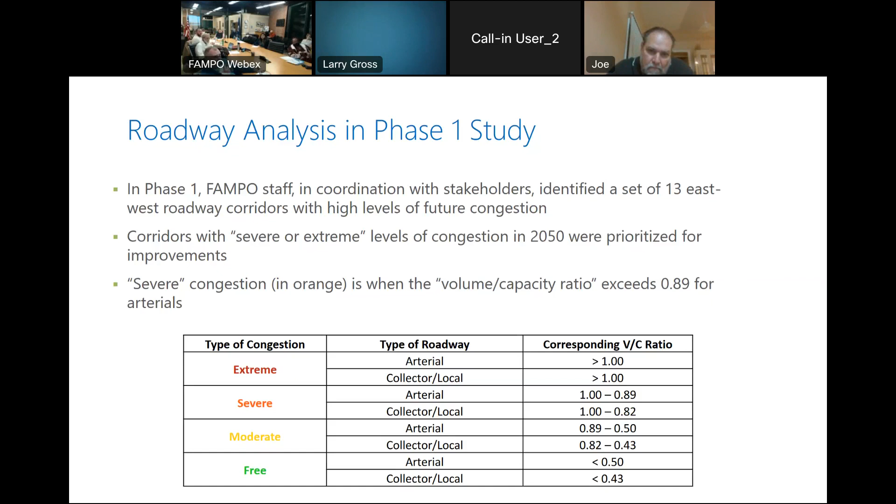And they picked these 13 corridors. Now, as they were going on for a future analysis, they were also talking with the citizens groups, policy committees, and about a few of these other roads. And I believe that initially Enon Road wasn't on this 13, and Stafford County staff swapped it back on. We'll get back to Butler Road, which you'll see eventually disappear from the analysis, because although it's identified as having potential congestion, within our current plans is an expectation that it will be widened to a 4-lane facility instead of a 2-lane facility. So in the future it would no longer be a congested, restricted network. So you'll see some of the movements happening.

Yeah, I remember that was one of the issues that came up during policy committee, where it showed Butler as not a big problem, and everyone put a red flag on that. But the model assumes that what is currently on our long range plan and is scheduled to be built or improved will happen. If we do everything we say we need to do, okay, what are going to be the next items that we need to address? So next slide.

So here are the corridors mapped out. As you can see, we are predominantly looking at east-west connections, and there's a general trend that they span 95. Those were the routes generally being picked up, because the consultants said that as our roads were along the I-95 corridor in areas that generated traffic, such as commercial real estate areas that were particularly automobile dependent, those areas are going to see more and more congestion develop into the future, even if we build out all of our current transportation projects.

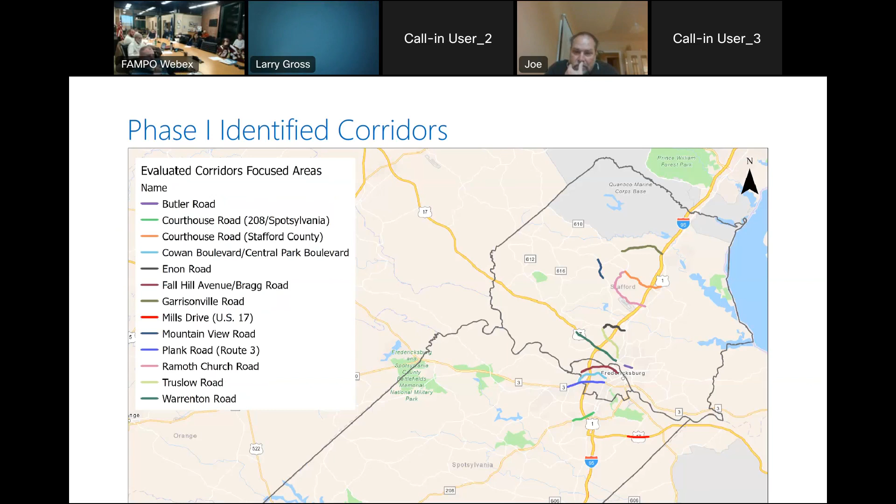Next slide, please. So jumping ahead, they actually took the peak PM volume to capacity ratio. So this would be peak evening rush hour.

So there were some questions and concerns. Why didn't we use AM, whatnot?

I can't speak for the consultant specifically, but my guess is that traditionally as traffic builds through the day, you have that PM peak and it's a little bit harder to work its way through, versus AM where you kind of start from a very low demand and it spikes rapidly. So that's my guess, traditionally PM peaks tend to be worse than the AM. Not always. I think Garrisonville Road kind of noted that the AM is probably a little bit worse.

So there are examples, but system-wide, generally, we kind of look at the PM peaks. And if you look at it, some of these are unequal. So just because one roadway - what was the best example? Garrisonville Road kind of shows that one direction tends to be a little bit worse than the other. There's a few examples where the eastbound, or depending on which way the traffic is flowing, is going to be worse than the other. That's traditional, what you'd expect from different traffic volumes in different directions at different points in time.

So really, about 0.65 you start noticing a little bit more traffic, just how it feels. You say, okay, there's a little traffic kind of picking up. As you approach 0.8, you're like, okay, this is getting congested. By 0.9, you're like, okay, this is heavy traffic, and then your blood pressure raises if it goes much more above that. So just to give you a feel for that.

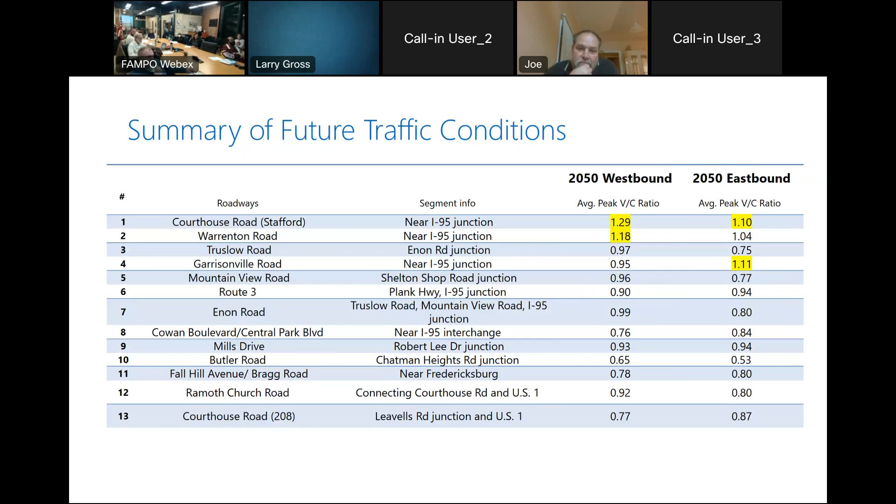So we're seeing significant congestion along our east-west corridors. Next slide, please. So again, I kind of jumped ahead - they said that there's a large amount of congestion in auto-oriented commercial activity. We still see severe congestion even after we implement a lot of our projects.

Some of the items they're going to get into later on is that we can do some specific spot treatments to very specific corridors, but we still see a regional congestion problem. So we're kind of doing small spot fixes, but we're really having a bigger picture item that we're struggling to contain. Next slide, please.

So the recommended corridors and approach - these consultants are taking a very high level look. They're not quite getting down into the weeds over the true engineering. That's a later phase, where they'll come back and say we get to pick our greatest hits and which ones they'd like us to explore from more of an engineering level. So this remains kind of high level. They're not really going in depth into design, not really looking at parcels or properties or the environmental costs.

It's still kind of somewhat remote. They can give very broad stroke cost estimates of what they think, but those can change as you dig down. So as they refine the various stages, they can provide a few more details there.

Route 3 continues to be kind of more of a bigger puzzle to solve, and some of the challenges it faces. I don't think they had really a whole lot specific that they want to address. It's just kind of news that that one's going to be a bigger challenge and probably needs more of a focus at a later point in time.

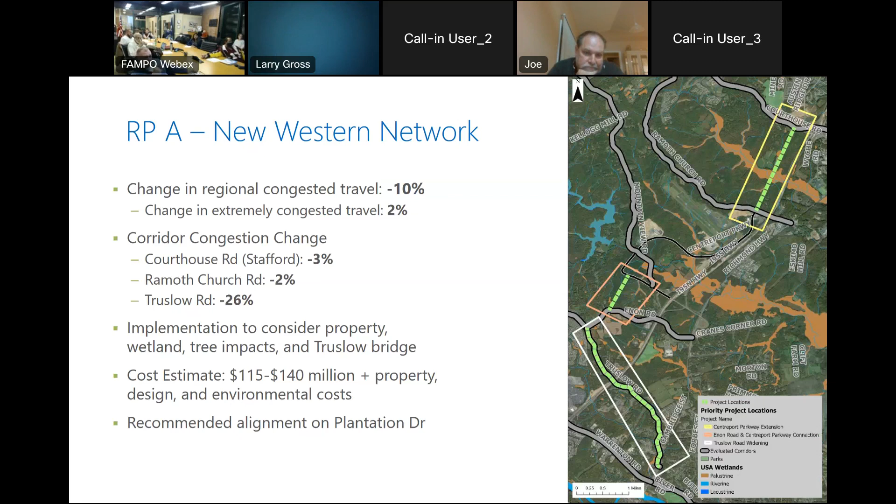Oh, and they're recommending aligning with Plantation Drive in the southern part. So that is the Western network they're proposing, to try to eliminate some of the congestion on east-west by making a north-south road. Next slide.

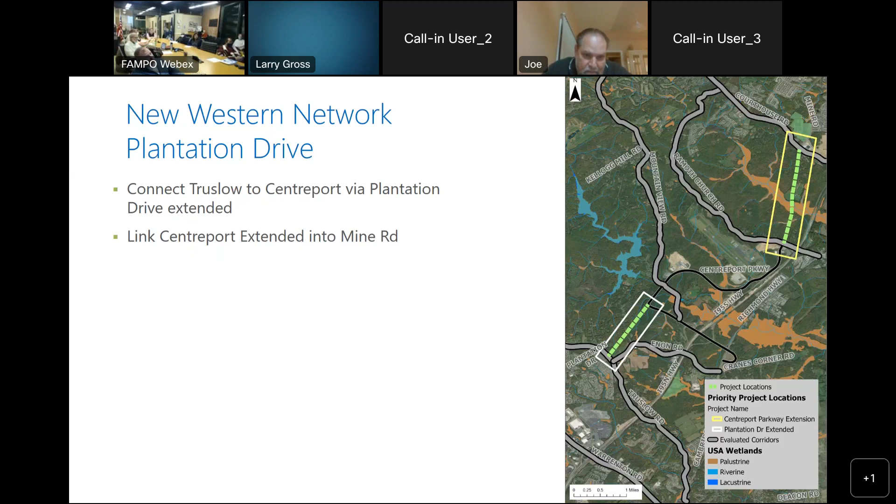So the new river crossing. This was another item that came out from the consultants. I'd like to note that there are two different things going on with the river crossing at this moment. Just before the consultants came to staff with this concept, Stafford County and the City of Fredericksburg requested FAMPO to do a river crossing study, or an early scouting project. So this is actually quasi-independent, or developed independently of those two items. Staff at FAMPO is further exploring this, but this is what the consultants VHB identified.

What they noticed is that there's a high amount of volume from Route 17 that is either taking US Route 1 or I-95 to access the Route 3 corridor. There's a suggestion of what they call a reverse C movement—coming down 17, going north-south on Route 1, and then back out to Route 3. They said that was a significant bottleneck, particularly putting additional pressure on the road network in and around the 95 and Route 1 connections. Those going beyond that area were dealing with a lot of local traffic.

In their analysis with the FAMPO travel demand model, they saw adding a river crossing reduce congestion within the region by about 10%. It actually has a very large reduction in extreme congestion. The roads that see the highest impact are Warrenton Road and Fall Hill. Route 3 does see a 1% increase in congestion, but that's very dependent on what section of Route 3 you're on—parts close to the interstate see a reduction, parts closer to Gordon Road see an increase. So not all roads experience the same amount at the same place. Cowan Boulevard also shows a small increase.

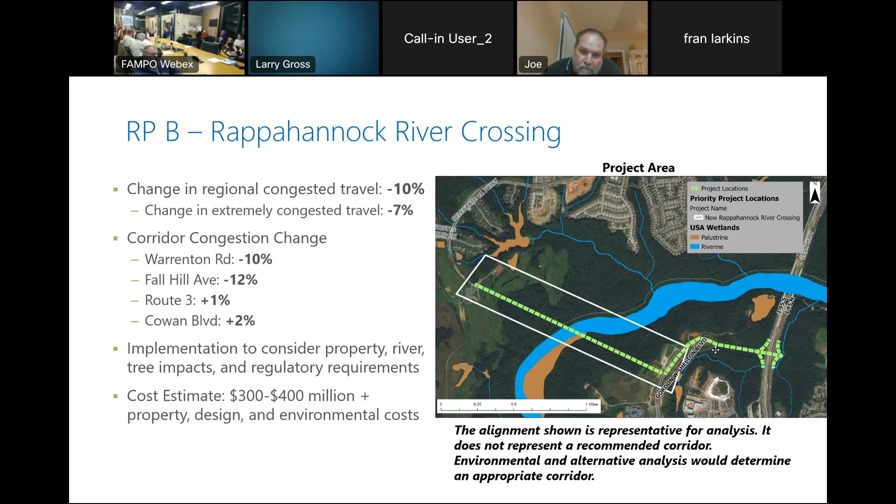Yeah, I think it's been talked about over numerous years. Decades, actually. At one time it was a gondola connecting from Celebrate, where the shops are right now, across the river to where Wegmans is going into Carter.

But I thought the north and southbound river crossing projects were supposed to mitigate the congestion on 17, improving the interchange there. Each of those projects cost around $400 million, but that didn't mitigate it. The southbound has been open now for a year, right? It's going to mitigate current levels, but not long term. What we're seeing is that we are going to build right back to capacity in short order. And the other item is, while it does make improvements, it's still funneling a lot of local traffic to basically the 95 corridor to make local trips across the river.

So was there a city council resolution? There's a letter and statement from the city, yes. No, it was a formal statement by the city to the FAMPO administrator.

This is kind of surprising to me because I was around when they first proposed beltways around the city, they called them the Northwest Corridors. And one of the biggest objections coming from mainly city residents and city officials was that the Rappahannock River is like the last, or next to last, river on the East Coast that still looks like it did before European settlers found the continent. It's an irreplaceable treasure, not to be screwed up with a bunch of bridges.

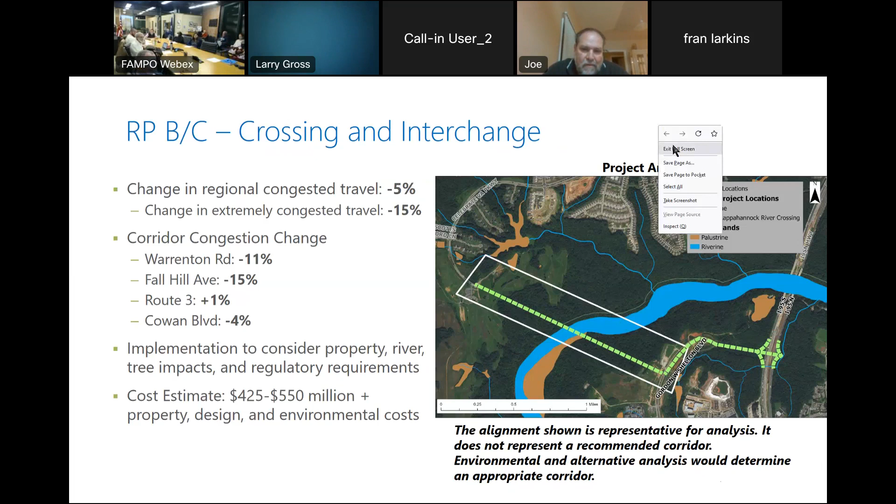I was noticing, on page 12, they make a reference to other strategies. I haven't seen anything mentioned on here about the other strategies besides building these roads. You know, on page 13, we talk about a few petitions, but we also had the transit report that was just adopted in the previous round as formal items. You're saying something was adopted; you were saying something was considered and rejected. No, so this is the roadway study. Phase 2 is broken up into two different areas so that the consultants could do it piecemeal, resize it for their scope. But there was already a transit report that was presented and adopted by the policy committee at their last meeting.

I'm talking about the introductory remarks in this report. You're saying things like consider reducing the volume to capacity ratio. Not accommodating it, but reducing it, which is what I've been talking about here for years, addressing the demand problem instead of trying to supply all the asphalt that everybody wants. So I think it's great that they're talking about reducing the peak velocity and the other strategies. But that's just an introduction. When it came down to the nuts and bolts of what they studied, they blew it off. Well, I wasn't at the meeting. Maybe it was considered, but if it was, I don't see any evidence of it in writing. So it appears to me the idea of reducing the demand for this asphalt is just being blown off, even though they say they're going to do it at the beginning of the study.

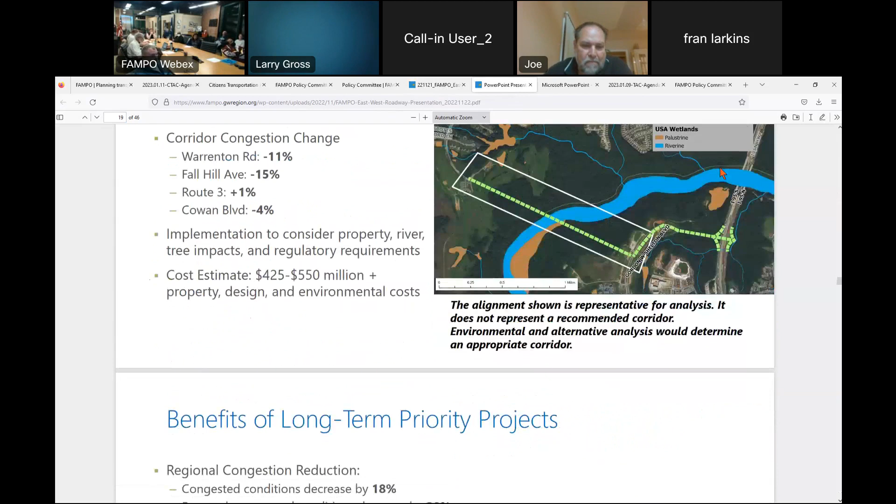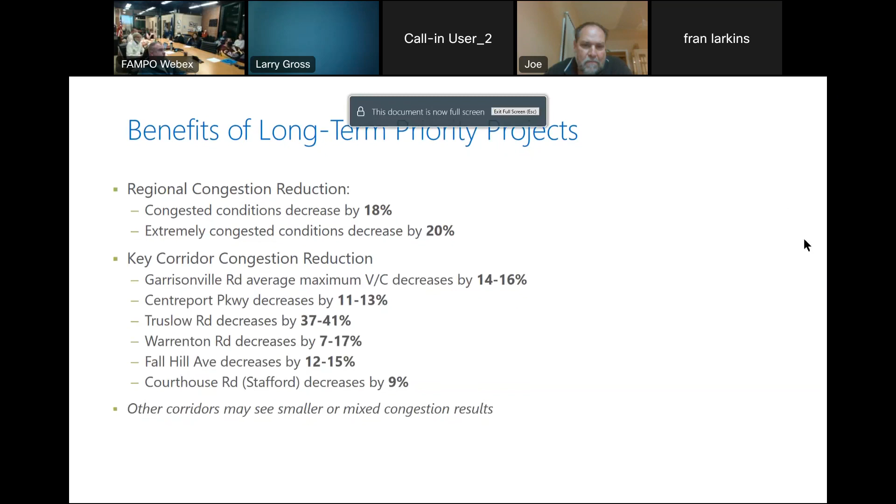Anything else before we move on? Okay. All right, let's jump to the next slide. Let's see what is next. If you'd like to look at a specific treatment, you can reference the full report so you can see how they got to their reductions. But the combination of, I think, the Western corridor along with the bridge created a pretty significant decrease in traffic and congestion.

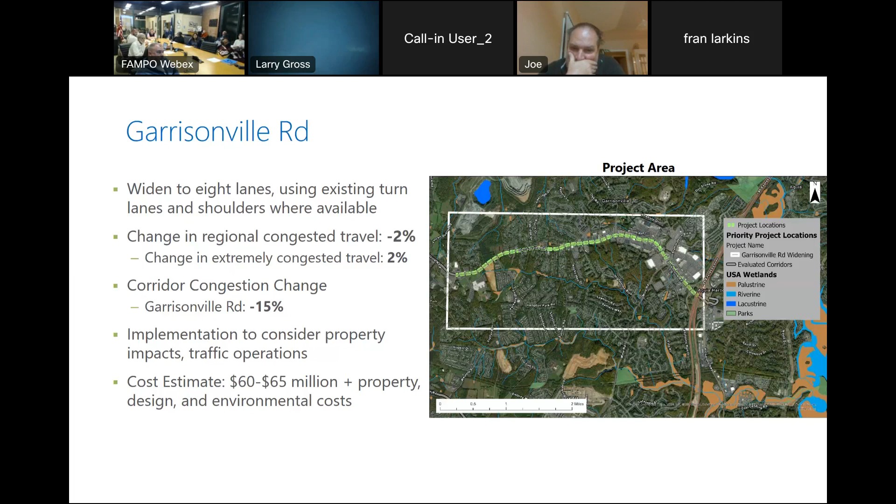Next slide. So, because I know that this is going to go over well, in addition to their Western network, they looked at spot treatments that were going to widen east-west corridors. For example, to accommodate the future growth and vehicle usage along those corridors, they were suggesting that Garrisonville Road would need to be widened to about 8 lanes. They are looking at using existing turn lanes and shoulders to make that possible. In general, for the region, this really doesn't do a whole lot to move the needle for reducing congestion. It just does a lot of congestion reduction on Garrisonville Road because there are more travel lanes. Cost is a little bit less than some of the previous projects, $60 to $65 million. That's actually a moderate amount for road expansion. I do believe that VDOT owns a significant amount of the right of way, so that was one thing that they noted.

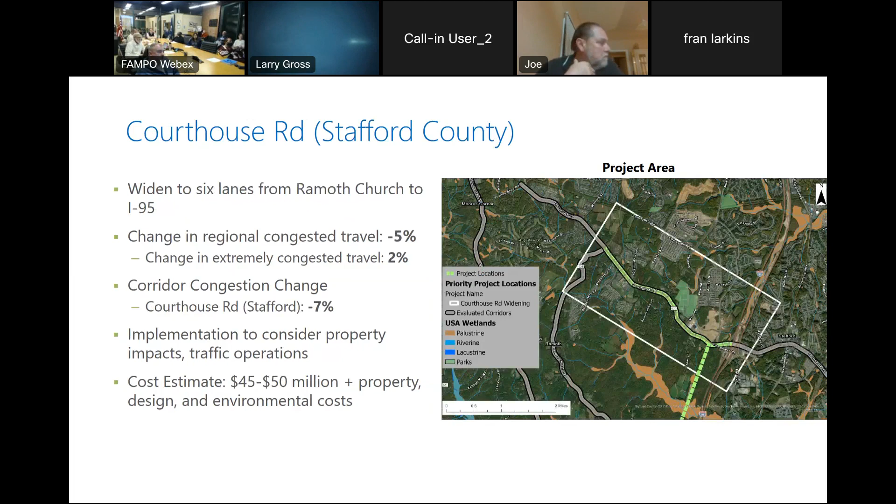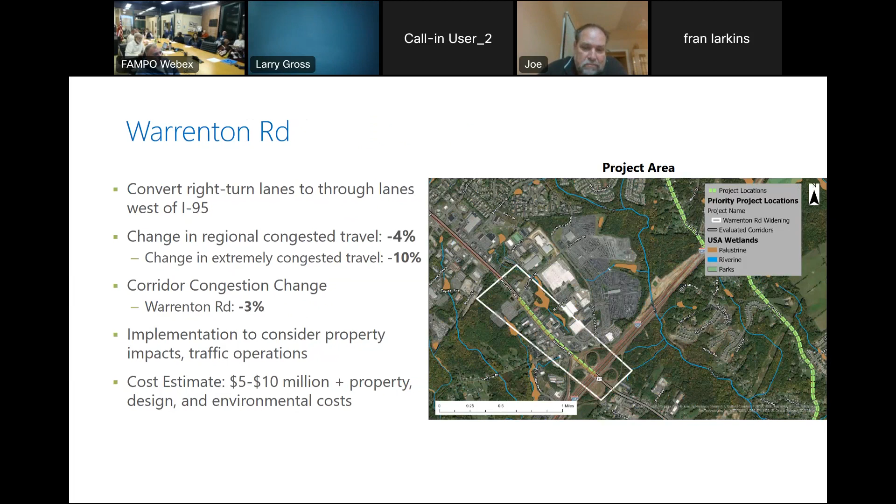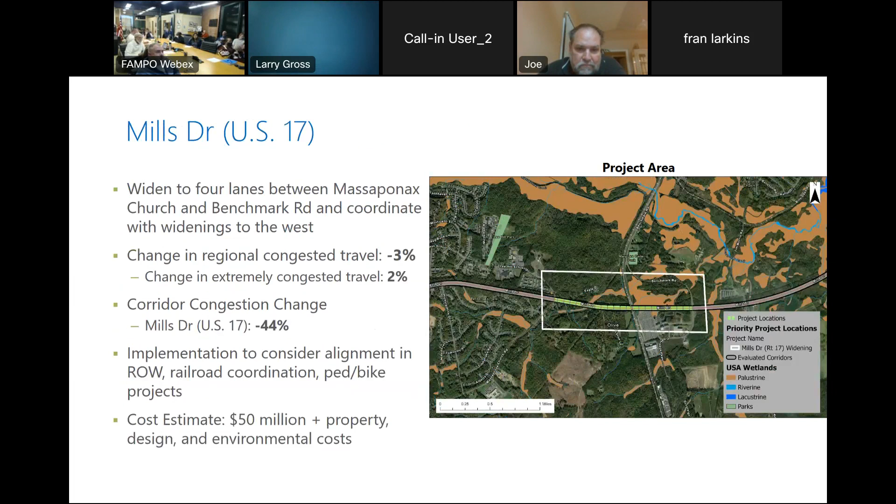Next slide. Courthouse Road, again, widened to 6 lanes. It creates a congestion reduction because there's additional capacity. Cost is kind of in the middle range there. Next slide. Warrenton Road, convert right turn lanes to through lanes, and we'll see a moderate amount of congestion reduction with that recommendation. Next slide. Mills Drive, again, a common thing to accommodate the future congestion, widen the lanes, so this will go from 2 lanes to 4 lanes. It has a congestion reduction, but again, it doesn't do a lot for the region. Next slide. So, are there any questions about those? I went through them fairly quickly. Okay. Next slide.

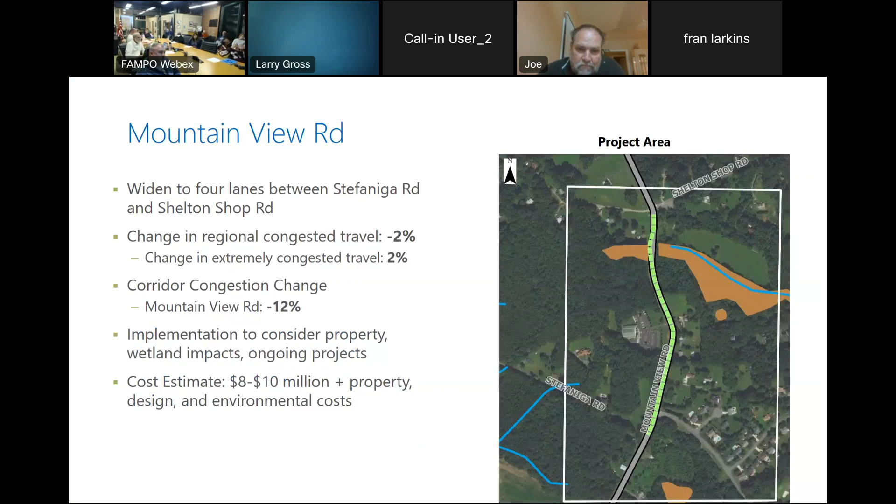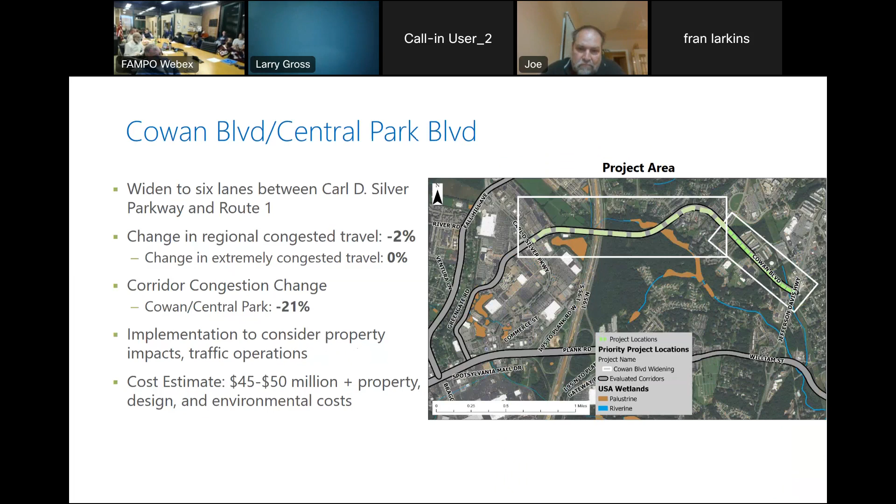Again, we have additional road expansions, 4 lanes with Stefaniga to Shelton Shop Road. This is a smaller project, but it would reduce congestion on that roadway, but not for the region. Next slide. Cowan Boulevard, they highlighted as a potential option to expand to 6 lanes. It would be a reduction for that corridor, but not necessarily for the region. That one probably has higher property costs, but to accommodate the traffic, we would be looking at that. Next slide. They also identified the Harrison Road interchange as a potential project. This would be a large one, and there are some other considerations to account for, but adding Harrison Road there, as well as the county's other projects leading up to it, would be a targeted project for some individuals.

And this one's kind of bounced around in the models a few times as they've refined and addressed some things. You've seen the benefits kind of fluctuate, but I think that's just an item as the model was getting refined, that the congestion reduction looked great in previous rounds, and then the reduction decreased. Is that correct? The point of the Harrison Road interchange, it has to come part and parcel with the 4-lane widening of. Oh, that's correct. Yes. From Salem Church on, but also this is the project that provides the most congestion relief to Route 3.

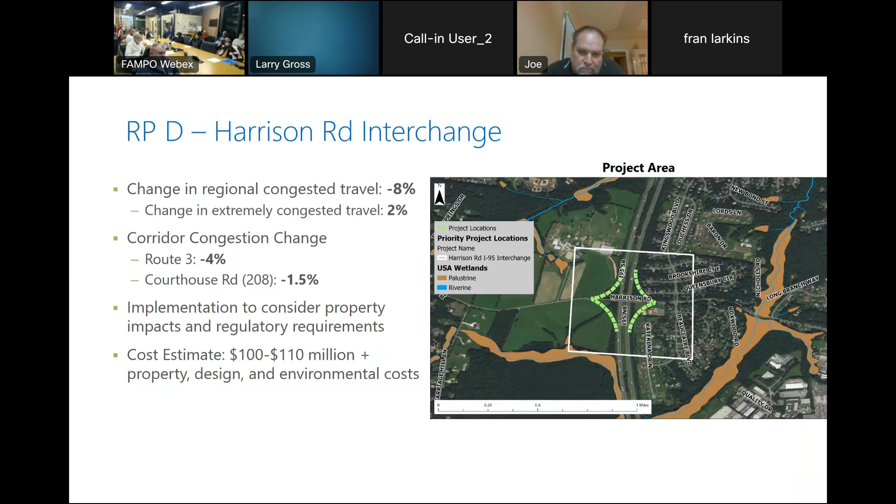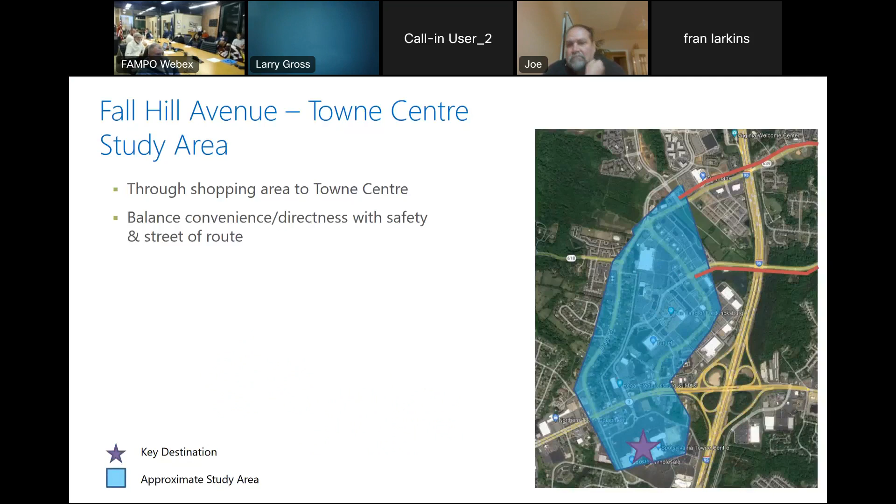Okay, next slide, please. So also in this roadway report were pedestrian and bicycle projects identified. Next slide. So they looked at connecting Fall Hill Avenue and the Spotsylvania Towne Centre. They drew a wide swath to identify potential alternative plans. Next slide. And the primary route that they identified would basically follow Carl D. Silver Parkway, along that central commercial center, and cross Route 3. So it was a way to expand and connect pedestrian activity, and that would probably facilitate other uses also happening in the Central Park area as well.

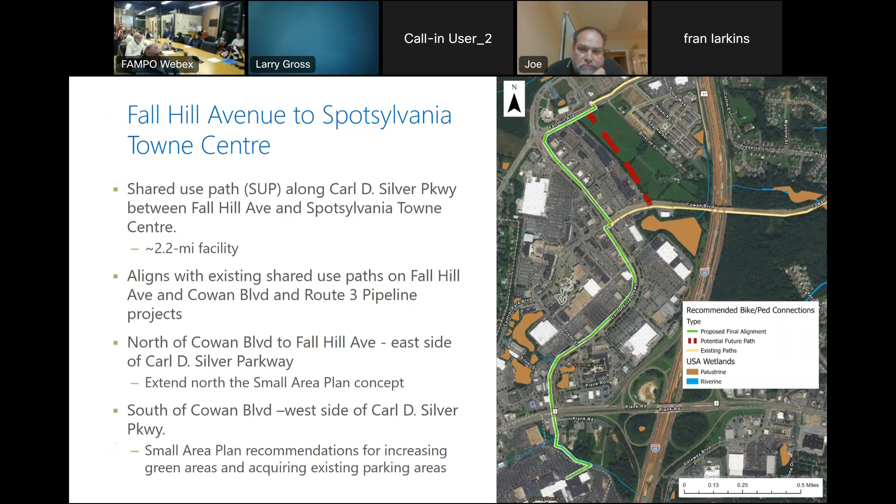It does have to zigzag a little bit across Fall Hill and then at Cowan as well, to keep the alignment, but that was one of the projects they identified as a needed bike ped shared use path along that corridor. Next slide. It does need land from parking, so there's probably some land cost that would have to be addressed with this project. Next slide.

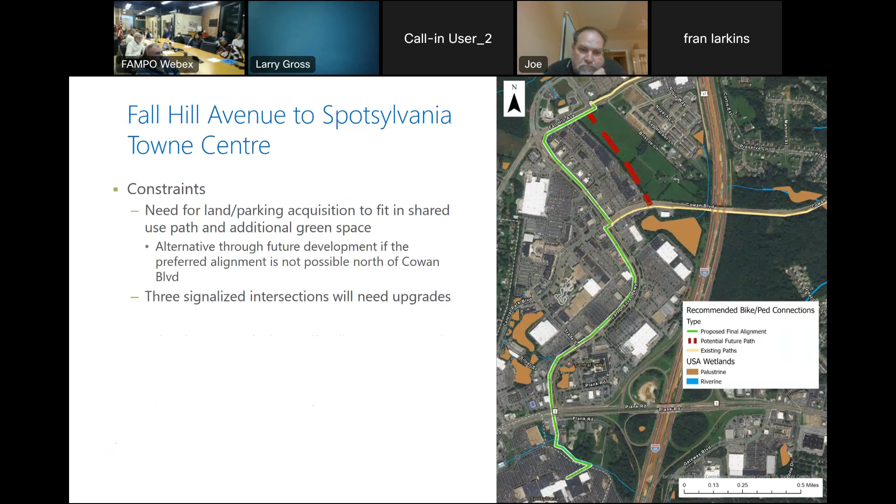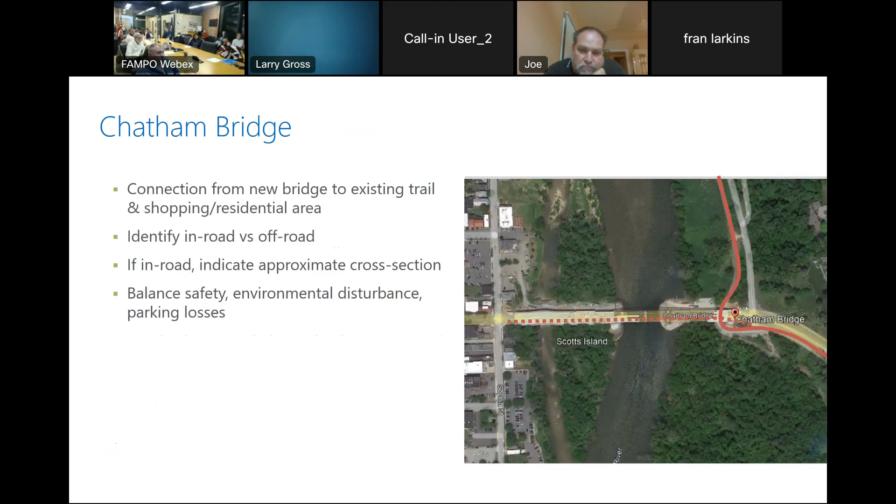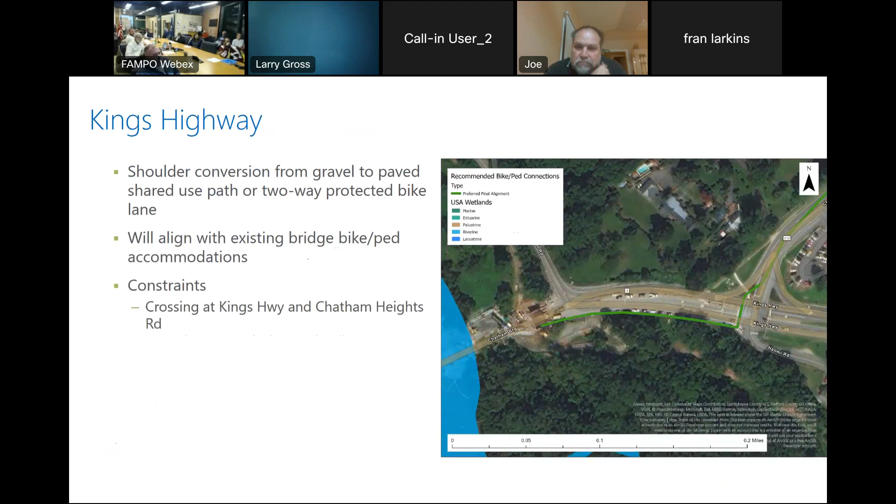So with the new connection from the Chatham Bridge, there's a future concept to extend the bike and pedestrian networks that are coming across it. So you can go to the next slide, and it's going to be particularly connecting with Chatham Heights there, to extend the bike ped facility across Route 3 and then up Chatham Heights Road. Next slide. And with this treatment, there's also going to be a recommendation of doing some road reconfiguration. Right now it's a 4-lane, for the most part undivided, highway. Occasionally you have extra lanes here and there for turn lanes, and a lot of spots you do not. The traffic volumes are relatively low, particularly for a 4-lane facility. They were not seeing as much vehicular pressure to need that.

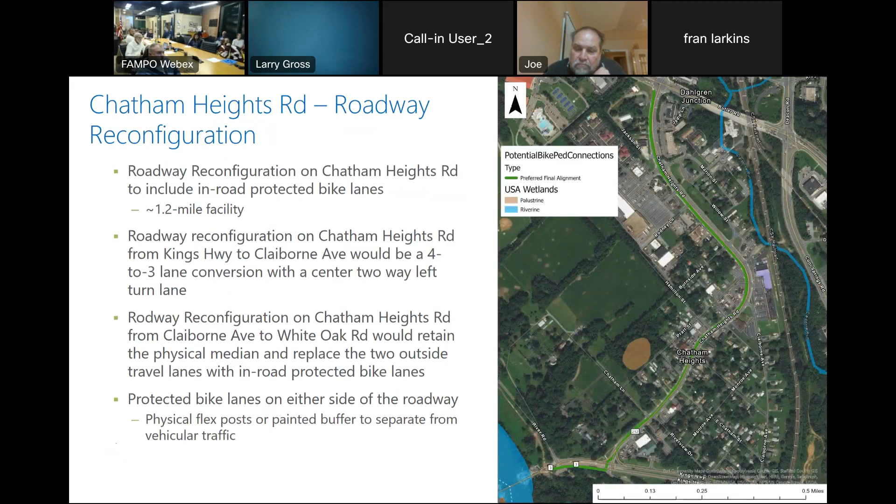And so if you go to the next slide, they're suggesting to reduce it to a 3-lane facility. It'll be one lane for each direction with a center turn lane in the middle. In some other places, they would call this a road diet. I don't know if that's a dirty term here, but that's the more common national term. As it stands, Chatham Heights Road right now is almost functioning in that capacity, that if you have to make a left turn, you have to do it from the left travel lane. So in a quasi default way, it's already functioning that way. And so to make the bike and pedestrian facility work, they would use the existing DOT right-of-way and then shift the lanes to provide the space while still mostly keeping the same amount of roadway functionality through that area.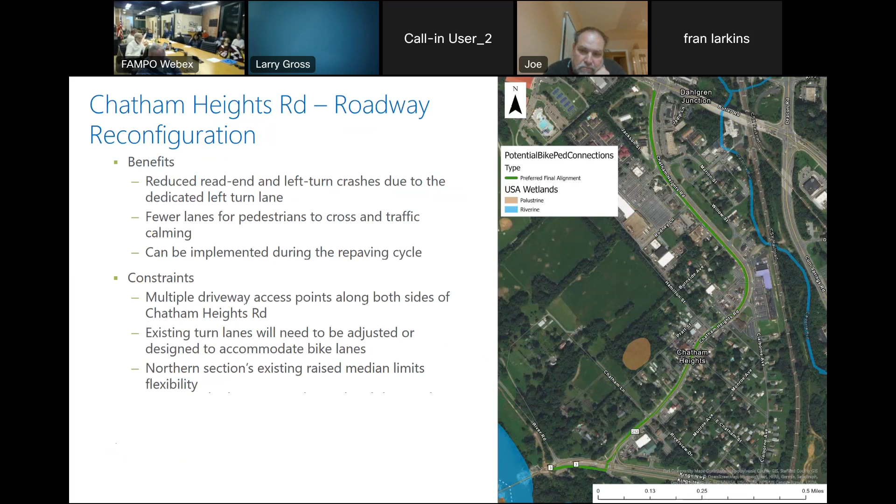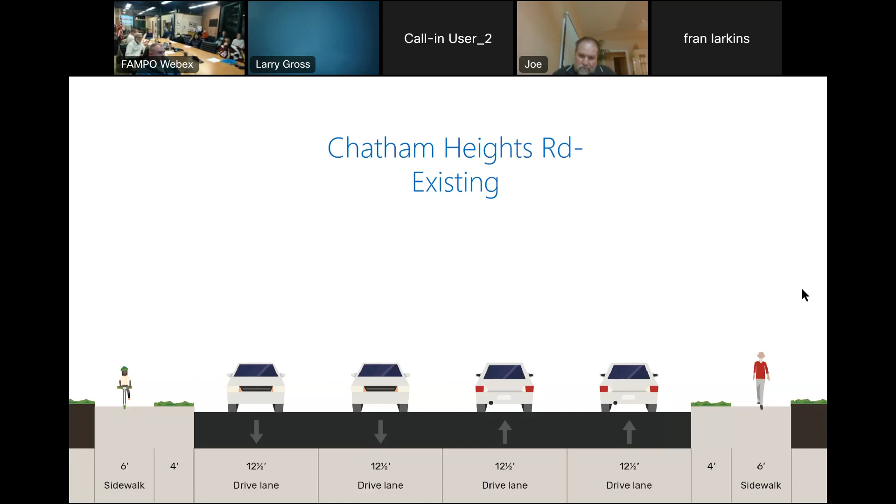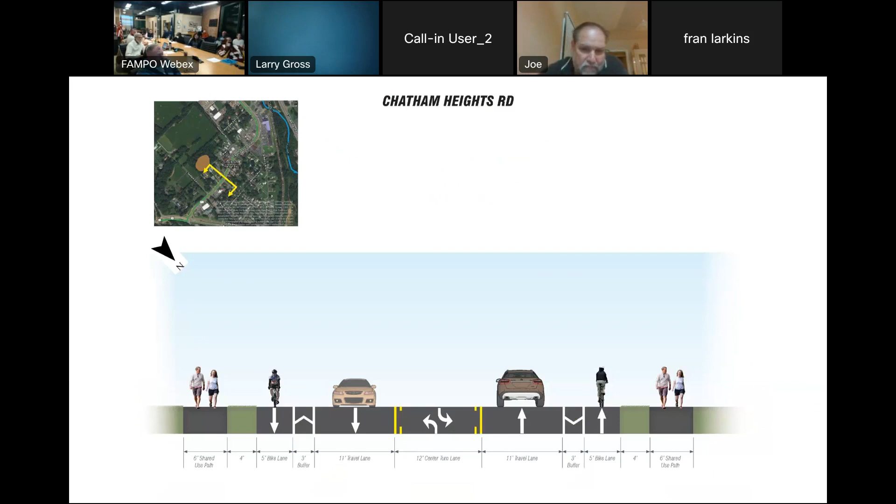Next slide. So this is the current cross section. As you can see, it's just a 4-lane with paint in the middle. It does have some sidewalk facilities around it. And if we go to the next slide, this is the recommendation. Typically any roadway that's under about 20,000 vehicles a day in average daily traffic, it works pretty well. Starting over 20 it doesn't work as well. 25 makes it not so much, but I think Chatham is around 14,000 vehicles a day, if I remember correctly. So this puts it in the perfect zone for this type of treatment. So that was their recommendation for Chatham Heights.

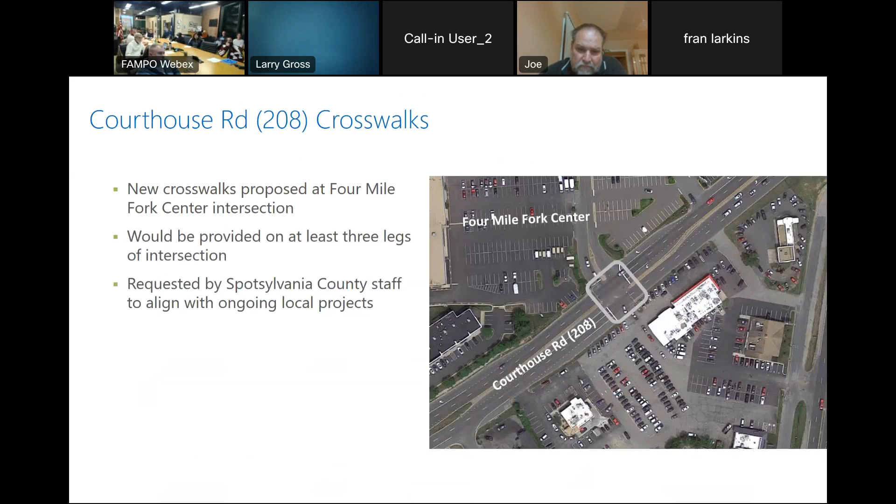Next slide. And then they also identified specific crosswalk improvements on Courthouse Road. This was something that was requested specifically by Spotsylvania County staff to align with other projects. Next slide. And for the next steps. So they identified, I should say, start with public. No, you're good. I'm jumping ahead.

That's my problem. So right now we're in the middle of our public outreach periods. So please, if you have comments on this document, please let us know. Based on the policy committee and public feedback, a final roadway report would be developed. So at this point in time, it's a draft. So if you want to come out and say, what are the other treatments? This is a good time to do it.

And they're going to also take a select number of projects that they've identified here and say, okay, they're going to take it one more step further and start to do some kind of early engineering design work for this type of project, so that it'll start creating a process that would lead to hopefully being a project competitive for a future round for funding approval. So it's kind of starting that process to say, okay, we've done a little bit of study work. Let's do a little bit more homework and start developing this into something that can compete for funding from the Smart Scale process. So next slide.

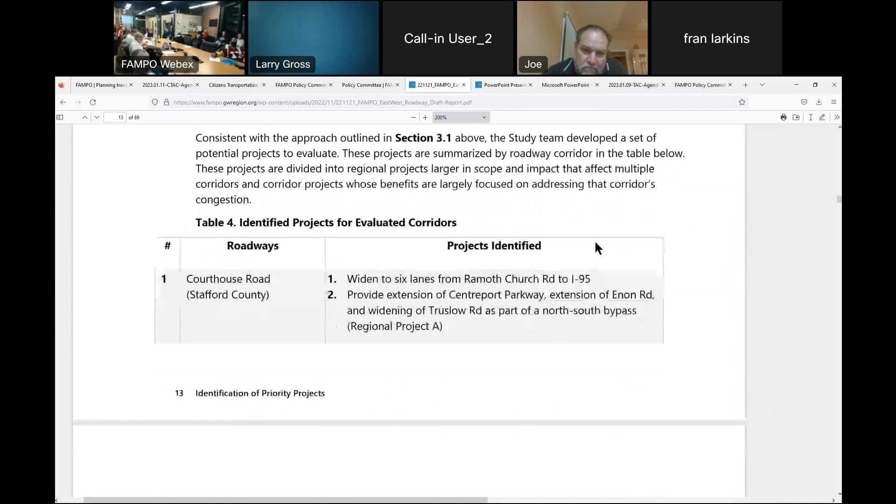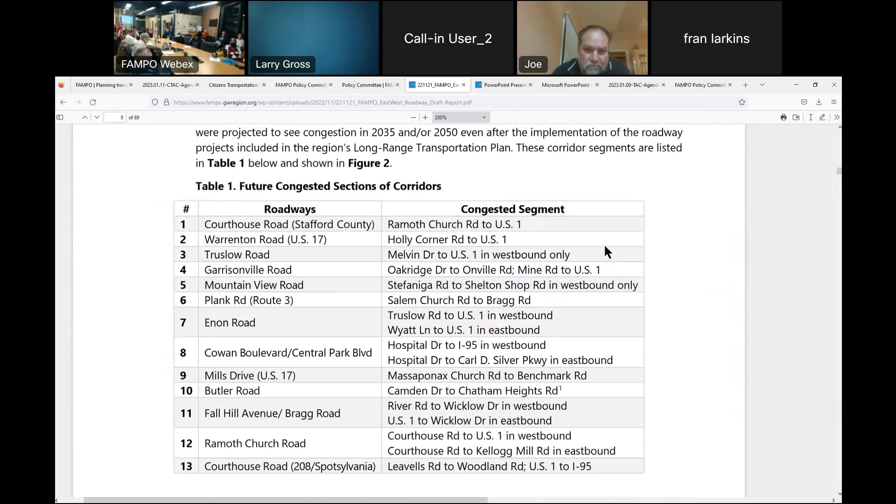Yes. Rupert. You skipped the mall flyover. The mall flyover. In the packet that we had to review for this meeting, one of the projects was a flyover at the mall. Anybody else read the material? I don't remember it immediately. Are we online to get this information? Yeah. It's online. It's the same document. Yeah, if you click the link in the agenda in the email. It was under the bicycle and ped section, which is why I was going to ask why a flyover is in the bicycle and ped section.

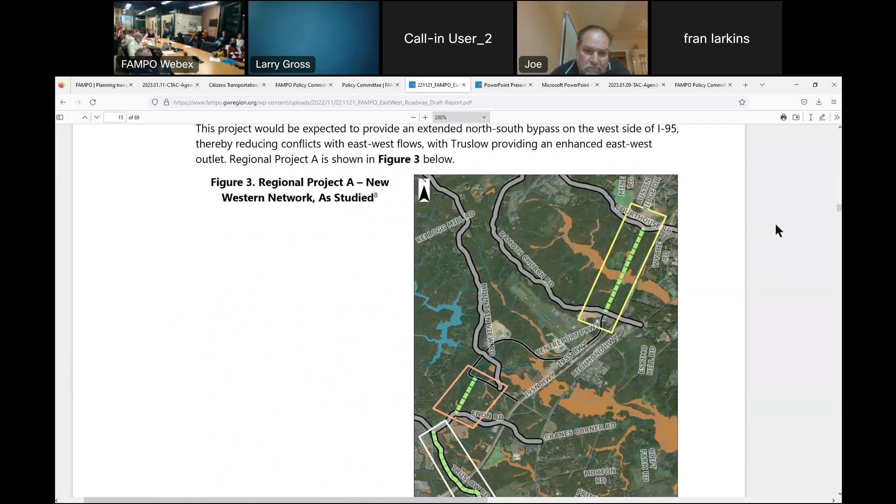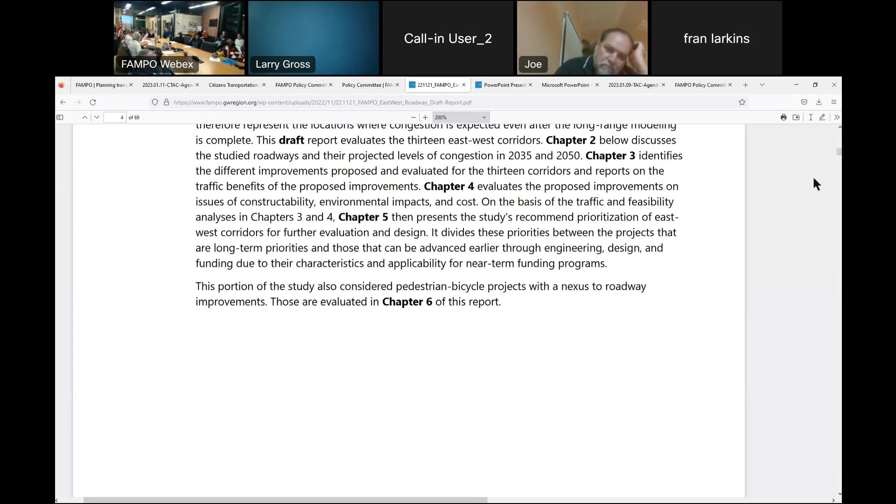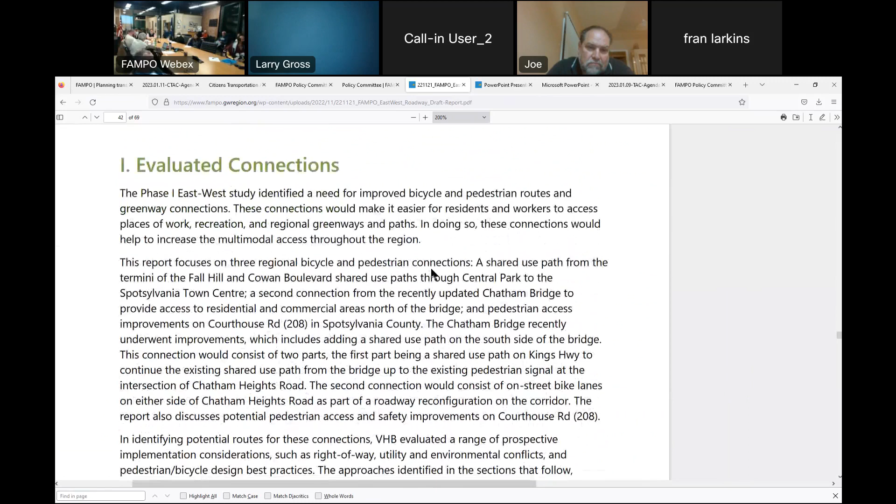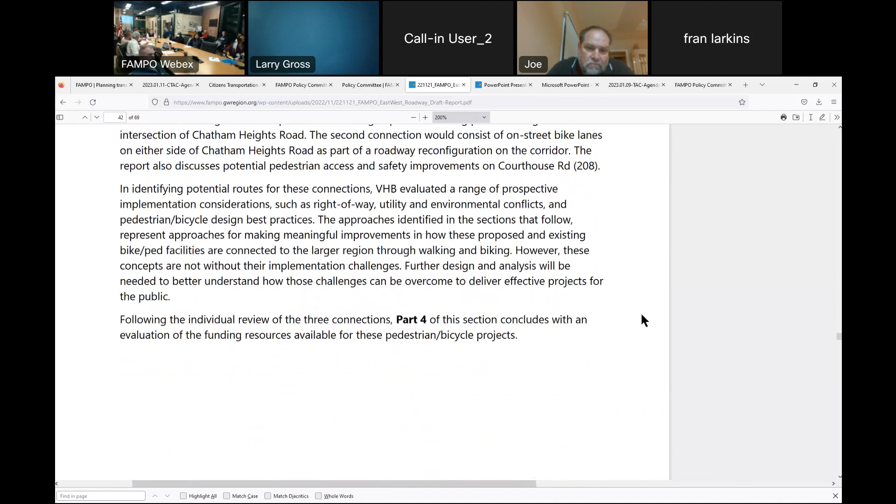Was this a bridge over Route 3 to connect the bike facility in Central Park to the mall? There was a graphic of it. Did they refer to it as a flyover, Rupert? Well, can we just do a find in page for flyover? They didn't use the term flyover. Oh, they didn't use it, okay. But what you would do if you're heading west, you have a flyover to get into the mall, which makes a left turn without having to stop for the traffic light like you do now. And I don't remember seeing that on the bike ped portion here. No, that's not it. That's the interstate. I'm not talking about the interstate at all. I'm talking about Route 3.

You're talking about Route 3 from the interstate going out into the county. Flyover from Route 3 into the mall. That's what I'm saying. Like you're coming from the interstate and you're going out into the county, but it's a flyover into the mall. Yes, okay. Yeah, it was in the materials. Right, we're at the Fall Hill right now, so. They were looking. Well, that's good. They do reference Fredericksburg Small Area Plan 1. That was fairly recent.

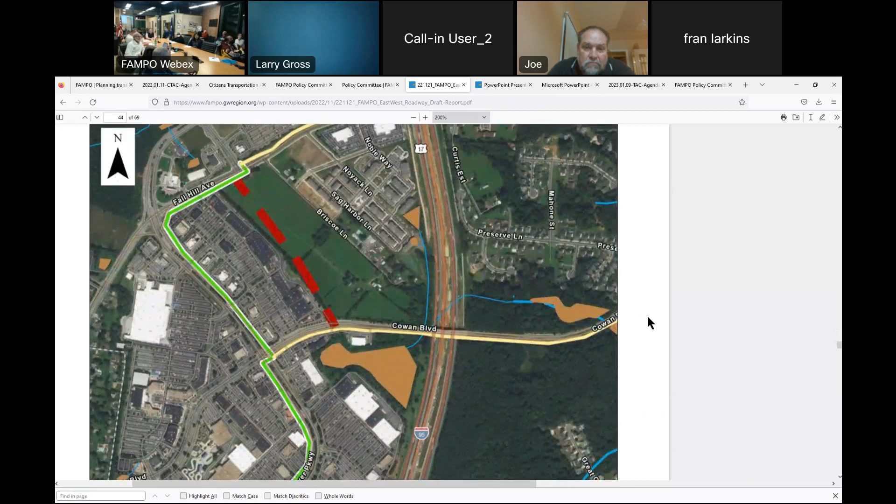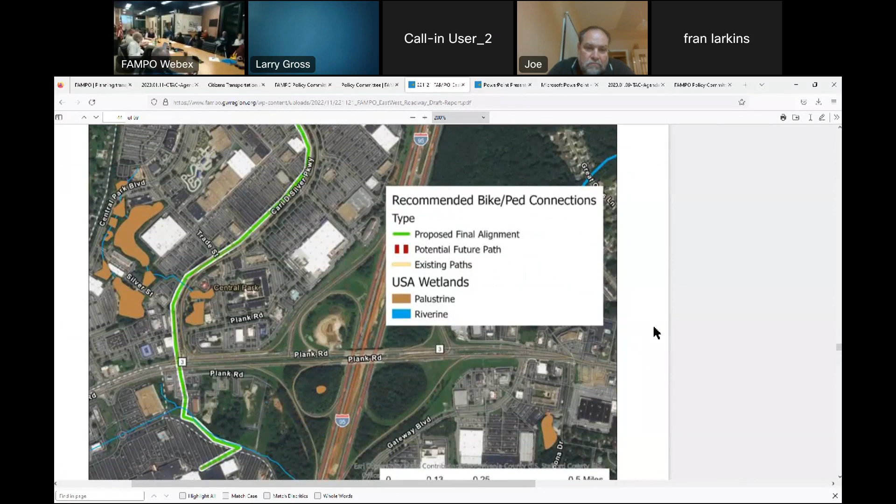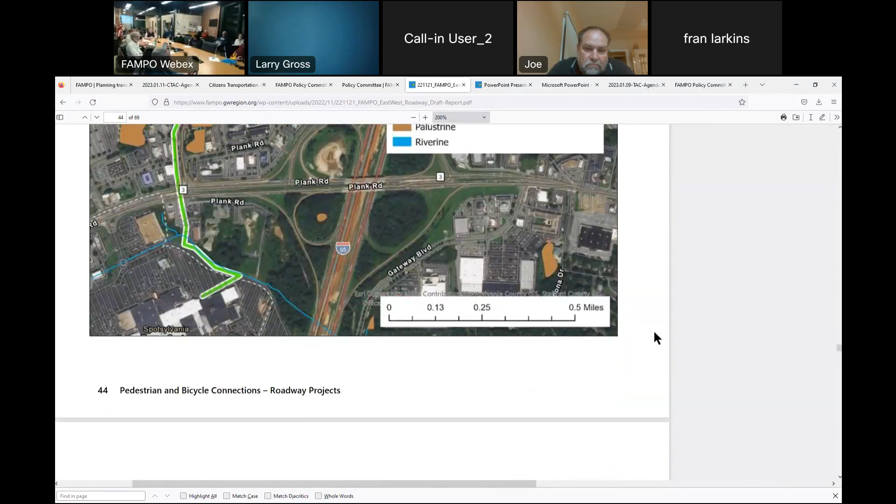Okay. What am I looking for here? I was looking for the graphic, that's easier to spot. It's okay. I mean, presenting a consultant's project is like presenting on somebody else's homework. It's a challenge. Rupert, if you find a flyover, please point it out for us, okay? If I find the flyover and share with everybody, I'm violating all those. Send it to me. I can pass it along. All right.

That's Small Area Plan 1. Whoa, there it is, the flyover. You're right, Rupert. This is from the Project Pipeline Corridor Study. And I believe what you are seeing is for this movement. Yeah, that's a movement you can't do now, because if you take a left at that intersection, you just go to the Burger King. You can't get to the mall from it, so that flies over it. You're right, construct westbound left over into the town center from Route 3, close Mall Court.

So I think if you go online and Google this, what Coley can do, we'll get the link to this pipeline corridor study. What you're reading there, I think is happening further back here. And there is a flyover proposed in this pipeline study. What are you talking about back here? There's a picture of the flyover right there. Well, I think what you're seeing is a portion of a study that's a long pipeline study.

What I'm reading there is not this. I believe when you see the entire pipeline study, it says construct westbound left flyover into Spotsylvania Town Center from Route 3 is not, I don't believe, at Mall Court. What I'm seeing here on this graphic, which is a portion of a longer study that goes out to Gordon Road, is a right turn.

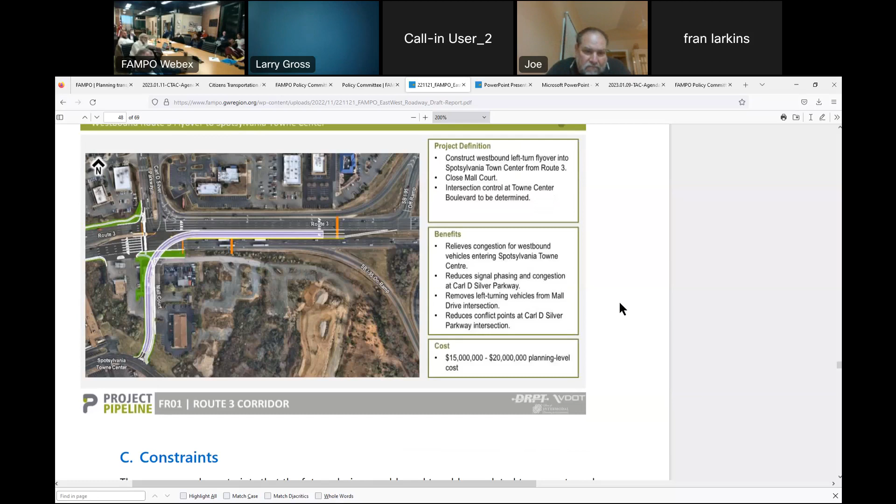This is where the Burger King is. No, the right turn is at ground level. I'll show you - that is a left turn. That is Mall Court, which is a dead end. And this is a westbound lane and a flyover. That's the Burger King, that's the hotel. So this connects to - you're right, because that's over here behind the mic - the westbound flyover. Scroll up and see what context this graphic has for the pipeline study.

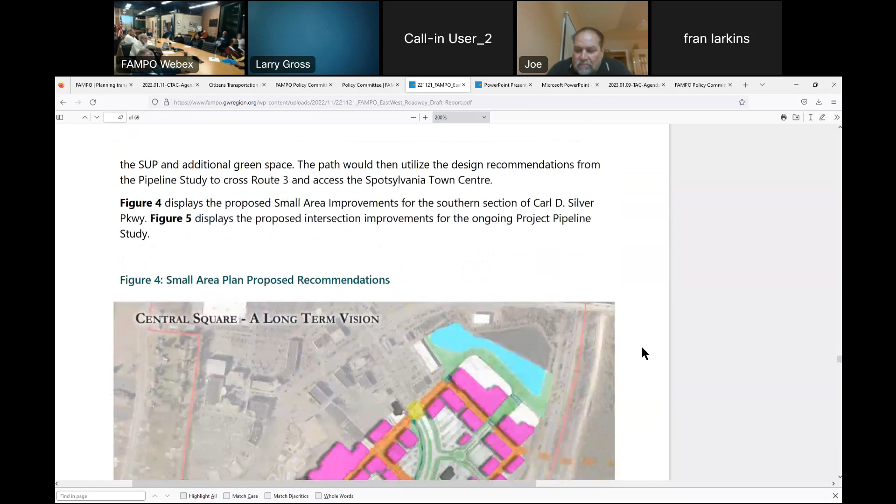Maybe go back up and see where figure 5 is referenced. Figure 5 displays the proposed intersection improvement for the ongoing project pipeline study. Yeah, that's the flyover - they're doing theirs. They're referencing another study there. You're right, Rupert. How do you like that? On January, whatever it is.

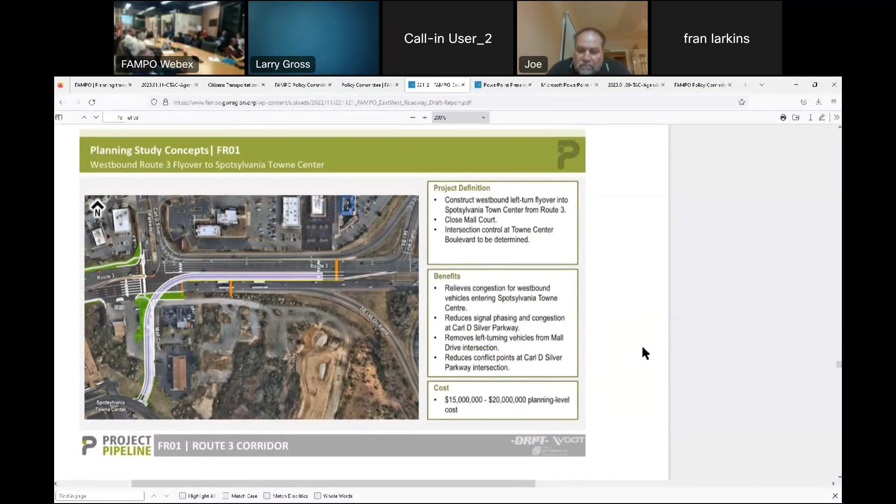All right, well, back to my original question. What was the question? Why was this skipped? Probably intentional. Why wasn't this part of your presentation? It wasn't included in the VHB presentation to the policy committee.

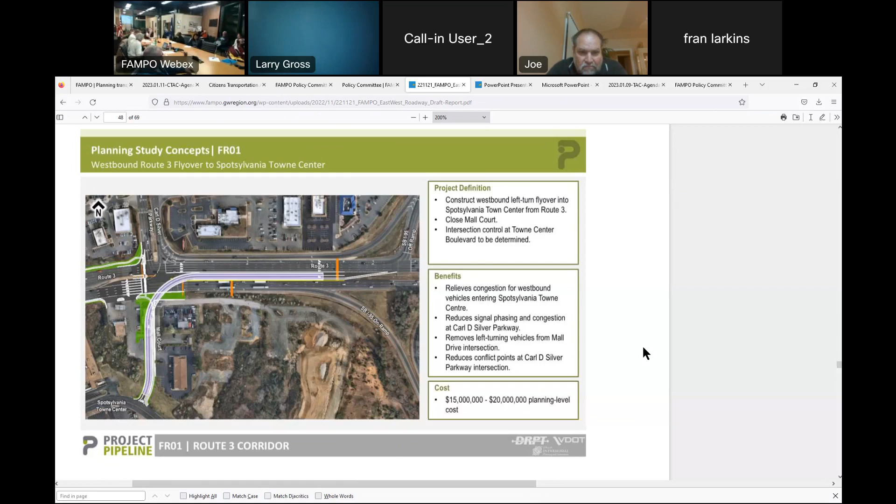This is a different study. It's a different study, yeah. It's been included because they're referencing other studies. For instance, figure 4 is Small Area Plan 1, which the Fredericksburg Planning Commission has been working on. Right, it's just showing that they're... someone else would utilize that - design recommendations from the pipeline study across Route 3.

So basically what they're saying is you already have these projects and studies on the books, and in their recommendations for the shared use path crossing, they're taking those designs into consideration. They're not necessarily proposing that - they're just saying, hey, you've already kind of put this into motion to a lesser extent. We're going to adopt that. We're not going to just ignore that that doesn't exist. We're going to take that into consideration for our proposals.

So is this project part of the public comment period? I mean, yeah, if you wish to make a comment on it, absolutely. And what is the end? I don't like it, that's my comment. Write it to me in an email, please. Yeah, I would appreciate you sending me an email.

When does public comment end for this? It's 60 days, but it started - date of the November meeting, that was right after Thanksgiving. So sometime around the end of this month. Then it would end. So it's coming up.

There was mention in the materials of the bridge crossing working group. What does that comprise? The bridge, like the Stafford, Fredericksburg River Crossing Study Group - is that the question you're asking? Group is the expression used in the report. I'm guessing that's not for this report, that's a separate process. I understand there's like 2 river crossing discussions going on in 2 different projects right now, but the East-West Working Group...

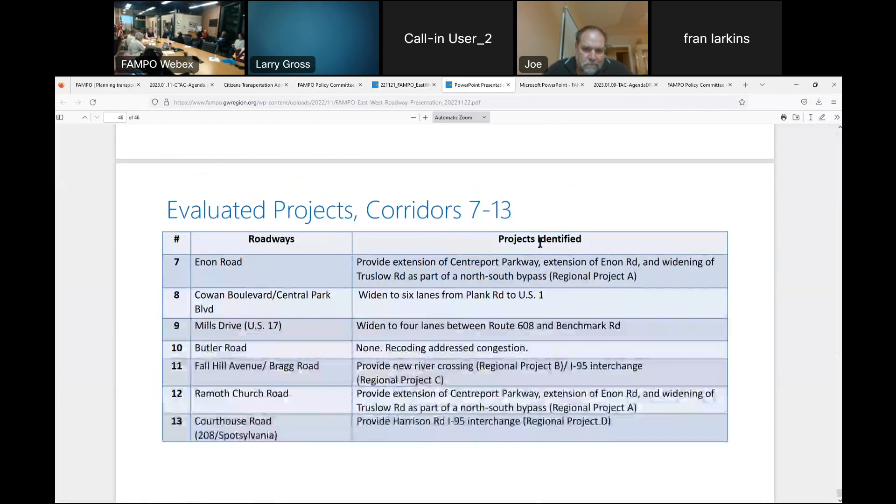It's amazing how this keeps coming up. One big example was the study the state did on the railroad between here and DC. One of the options proposed back in the 70s was to have an alternate route going up the 301 corridor, which would avoid the Capitol so that you would eliminate the danger of someone bringing a bomb in on a train right under the Capitol building.

And how much value did they put on that? What value do you attribute to protecting the Capitol from a nuclear bomb? Zero. That's doing the same thing here. We're still talking about FAMPO, right? The region.

Are we ready to talk about CMAQ yet? Okay, let's move on. So FAMPO runs a competitive process for Congestion Mitigation and Air Quality, and Surface Transportation Block Grant funds, for our member jurisdictions to submit projects to be considered for rounds of funding.

Currently we are in fiscal year 28, 29, I believe, for the rounds of scoring. If not, it's 27, 28—I'm sorry, my previous MPO was off by a year, so I keep getting it reversed. But if I'm wrong, I'll try to correct that. In any case, I believe...

Let's see, Spotsylvania County submitted, I think, 9 total projects. Jurisdictions can submit projects that score in both CMAQ and STBG, as well as ones that only qualify in one. The city of Fredericksburg submitted a significant amount. FredExpress is also an eligible entity for these funds, and they submitted, I think, 5 projects total. And then Stafford County submitted 4 projects that were dual eligible in each one.

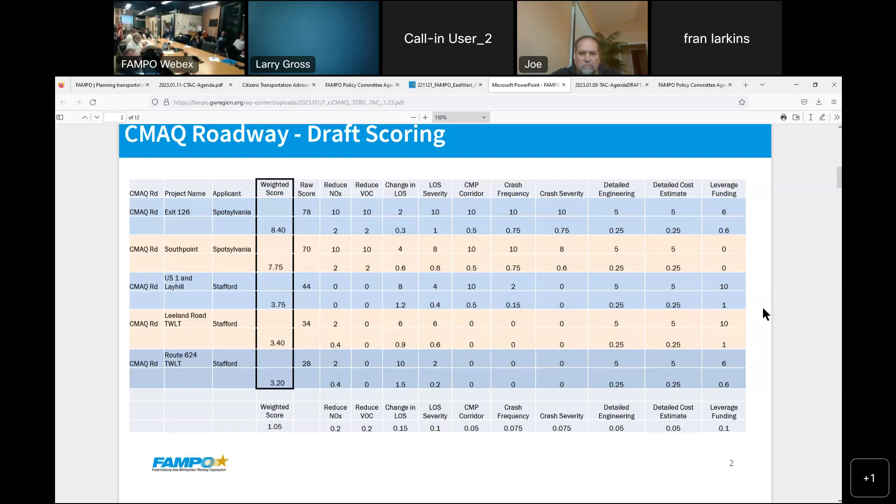Transit projects included the transit hub in Stafford, vehicle replacement, as well as the development and capital and some operating expenditures for the Route 2/17 bus line proposed in Spotsylvania County.

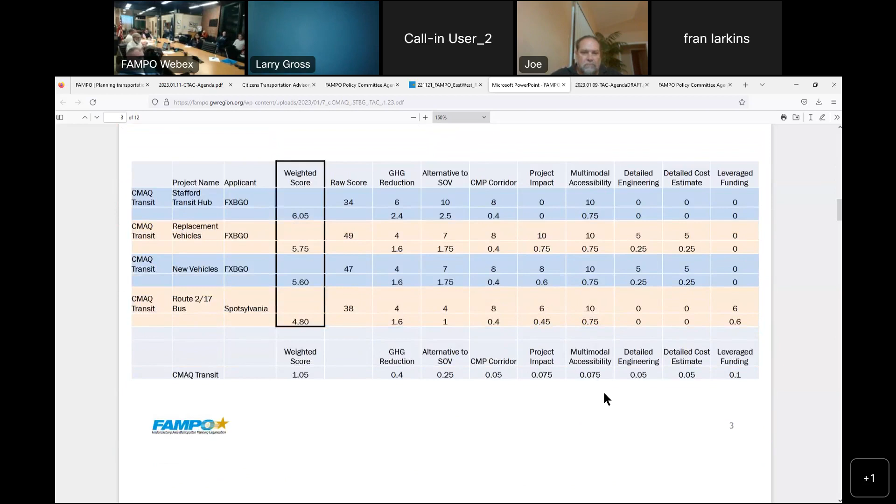Next slide. We had a fair amount of active transportation projects, including an extension of the Bankside Trail in Fredericksburg to go under the Chatham Bridge to the library, as well as the Gateway Shared Use Path and VCR trail bridges. If you've been following along with some of the other VCR work, those were submitted by the city.

Stafford County submitted sidewalks along a portion of Route 17 that currently does not have sidewalks, but if you go into Google Maps, it's near Powell Street, I think. You can see that it's a fairly frequently used corridor because there are several goat paths that are kind of there.

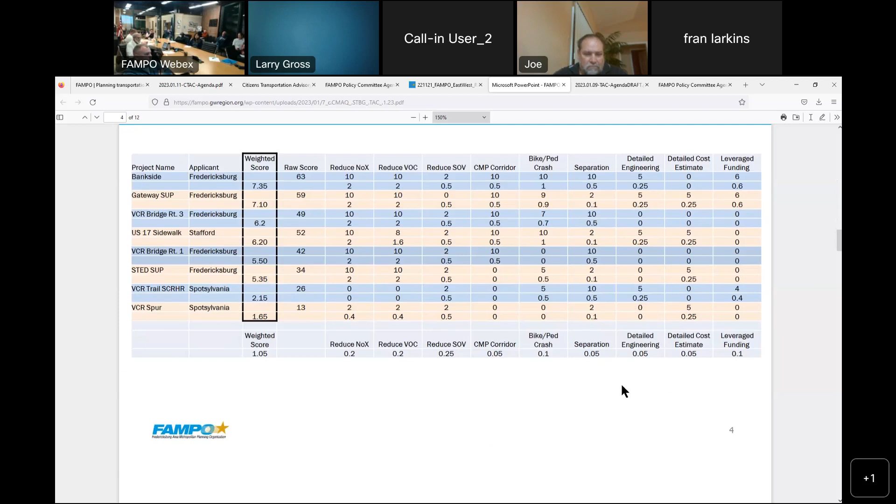There's the shared use path kind of in Central Park that was submitted. The VCR trail in Spotsylvania. Spotsylvania had two projects that were kind of very small segments, along that same area: the VCR spur and the Salem Church Road, Harrison Road. They're trying to connect two different parcels, or two different pedestrian networks, so they're much smaller projects. Those were submitted.

Next slide. Likewise, a lot of the projects I've mentioned were eligible for CMAQ. Some others are only eligible for Surface Transportation Block Grants. In this case, Spotsylvania is asking for preliminary engineering funds for I-95 expansion, basically at exit 126, to continue the 95 expansion.

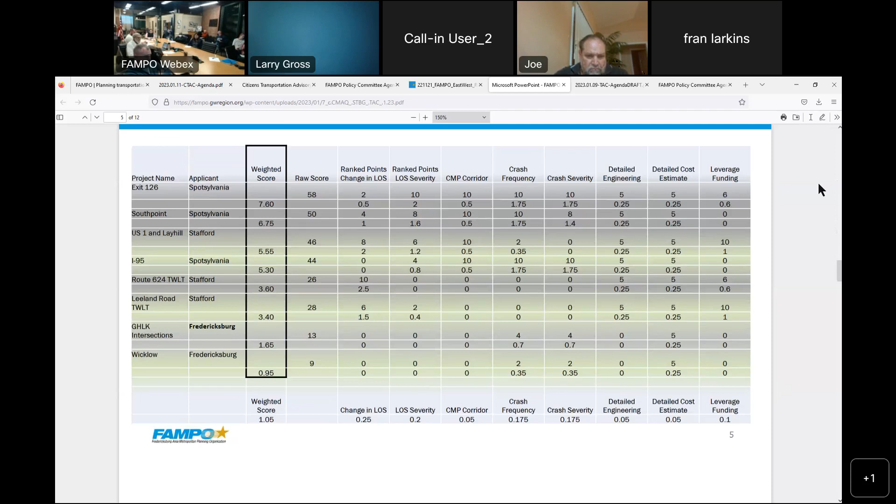The two-way left turns are also requested. George Hanover, Littlepage, and Kenmore Street intersection improvements in the city, as well as Wicklow Drive, were requested. Although Wicklow Drive does have a lot more pedestrian infrastructure, it was not eligible for active transportation funding, but was eligible for roadway funding because it had roadway elements that could be considered. So that was submitted in that category.

Next slide. You have various transit amenities throughout the network, as well as vehicle replacement submitted by Fredericksburg Go. Next slide. And several studies proposed by the various jurisdictions.

The Harrison Road 4-lane option was submitted by Spotsylvania. High capacity transportation service was submitted by Fredericksburg Go to build off of the recommendations made in the transit report of the East-West study.

Fredericksburg is exploring, or asking to explore, ADA connectivity to the VCR trail, as well as the William Street options. FAMPO also includes more of an engineering study for the river crossing. However, FAMPO does not score its own potential projects or requests. We can just present those to the policy committee for consideration, but they are not technically scored.

And finally, next slide, we have ineligible projects. Stafford put the US 17 sidewalks up for consideration. Unfortunately, it's not within that 1 mile buffer in the Garrisonville area down to about the courthouse, so it was not eligible for those funds.

Next slide. So the next step is that we are going to continue to refine the scoring. There's going to be a little bit of movement within those scores. This is the opportunity to make sure we are accounting for every single decimal point possible. We're going to receive the exact budget from VDOT in the coming months.